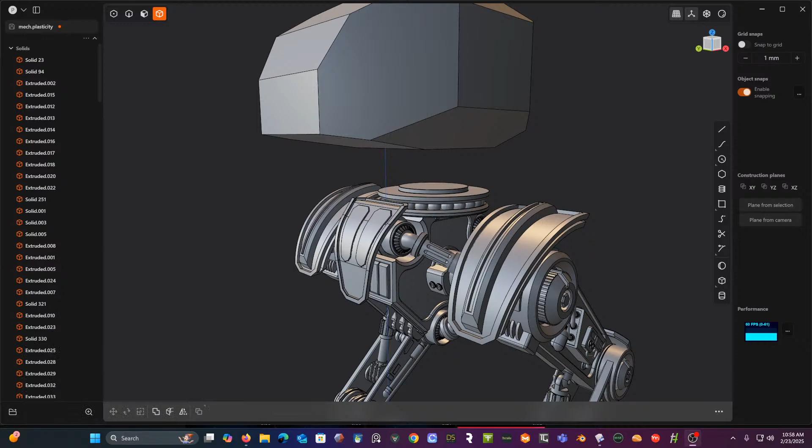Right now I'm just checking out some of the stuff I've done before, trying to figure out what I need to do next. I think this toe has more detail than these other guys here. So I think I'll duplicate this toe and these parts around, using a radial array, doing it 4 or 5 times, then deleting the extras. That's what I did to begin with.

Now that we've got that toe made better, we're just going to grab these pieces here. Hopefully no problems - yeah, we've got the tread. I think I might have already had tread before, but I was wondering if maybe I hadn't.

I'm going to go from the top view. Let's hide some stuff out of the way - I can't see, so that always helps. We'll unhide this stuff shortly, just want to get it out of my way.

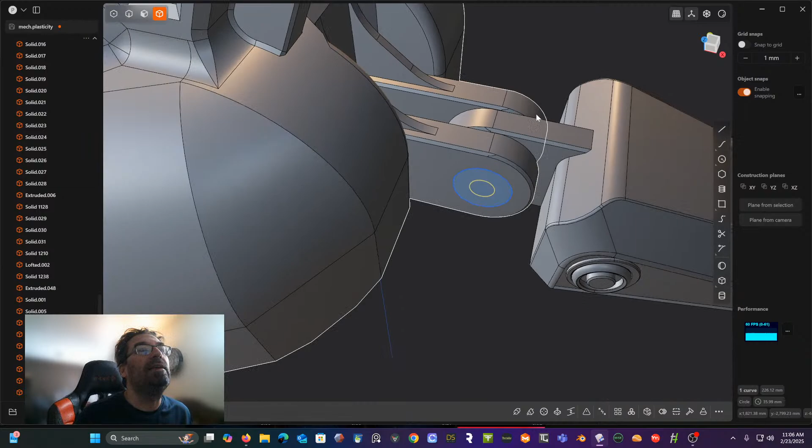I'm going to now, with this angle here, make a cylinder first of all that we're going to delete because this part is already solid. If I make a hole here, it's going to be difficult to go around and radial the physical hole that I made.

So what I'm going to do is make an object, and then we're going to boolean that away from the main piece. So if I just grab this guy, hit W, select the piece I want to minus it from, and go like so, it's now gone.

But we need to also do it to this other object because it is a separate one. I'm going to grab that guy, go here to my curve or my face mode, click on that. We're going to say W from this guy and now push that through for him too.

And now we have a hole through for both of those. Not what I wanted to do though. I just realized my whole purpose for doing this was not to do that. Once again, let's get this back. I need to make an actual object, not the hole.

So grab that, we're just going to pull this out a little farther on that same axis. And now I'm just going to extrude it through without the minus so that it just comes through as a solid object, because that will be deleted, so not worried about its length or anything.

And now I am going to try and radial array that around again. Should have left everything turned off. That's okay, it's easy to do because I can just marquee select all this stuff. Just get it out of here.

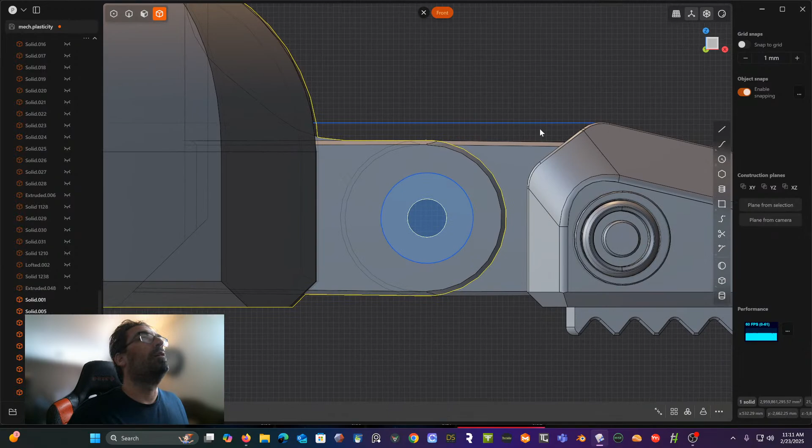Now in leaving these circles here, we are set up for our pin. I do chamfers and stuff sometimes just because, you know, these will never be seen. So I'm not going to do them here, but sometimes I do that so that they look cool. I don't know that I'm even going to make the pin for the middle because these could just be caps on either side, you know.

So let's just go ahead and loft from here to here, see what happens. And now we're going to make this a rounded shape. So let me see if it will let me turn down or up the tension. Does that work?

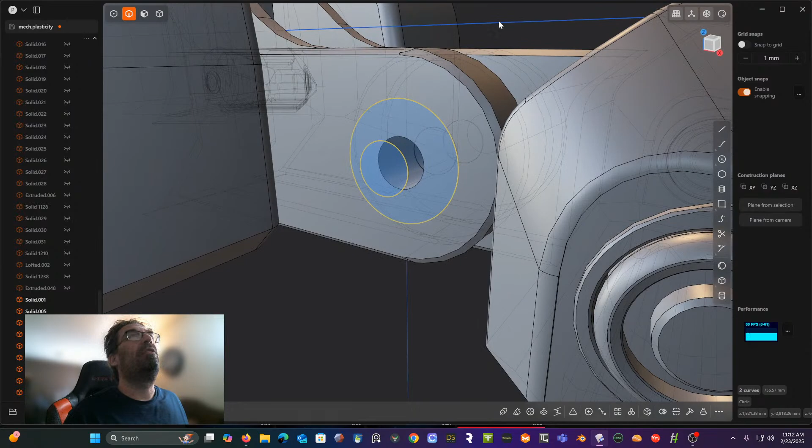It probably wants some form. Let's undo that. Yeah, I'm going to have to probably either put a guide in, meaning let's make a third circle. You're like, what do you mean by that? Well, let's make a third circle. I'm going to turn off the internal lines there. I'm going to grab this dude, I'm going to duplicate it.

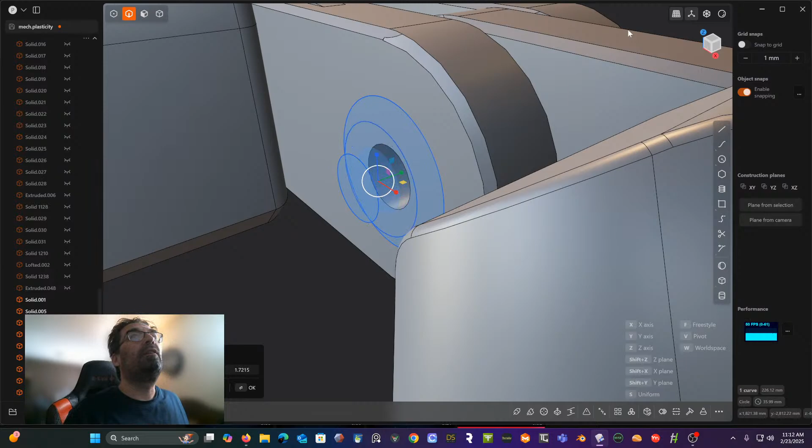We're going to move it in somewhat farther because I'm just going to loft between these 3 shapes. So scale, we're going to pull that out, and then we could look from the front or the side to see where that offset's going to be. And I want this to be like so, I guess. I'm going to grab it, move it forward just a little bit like that, to where it's more in the middle. Hopefully this will loft pretty.

And then we're going to grab these in order and click L. And yeah, that looks pretty good. And then we can take this shape and just cap off everything like that.

Looks great. And then I'm going to go and take our circles, not the lines, because remember those other lines were for our division of the middle of the foot. We may use those yet again.

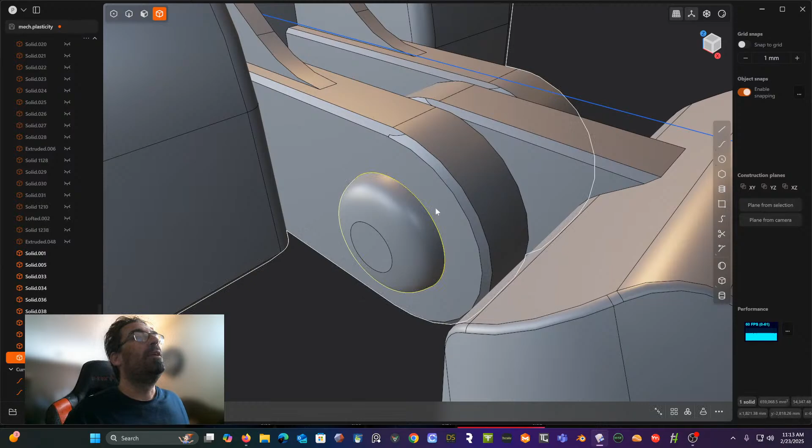So I'm going to take this one here, grab its edge and chamfer that in. We don't need to do a bevel on that because there's just no point. I don't know why it's in 3 pieces. We're going to see if that joins up. And then I'm going to chamfer that in to give us a little bit of separation there, like so, because it will catch light and all the good things.

And then I think maybe just one, let's just go ahead and do a fillet, a tiny fillet right on this edge because it helps catch that light nicer as well.

And then let's go ahead and push this shape inward a little bit. We could go outward. Maybe we should go outward. Now, we can if we do it as an extrusion. Let's see, if we go this way, we can... nope, that's not going to do it either. It's got to be an extrusion.

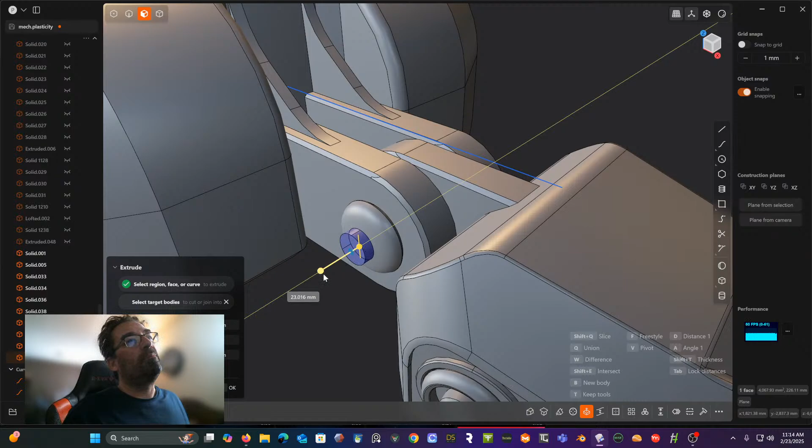So, extrude, we can come out with it. Looks a little more like it's some kind of a pin, I think. I like that, so we'll just go and do that.

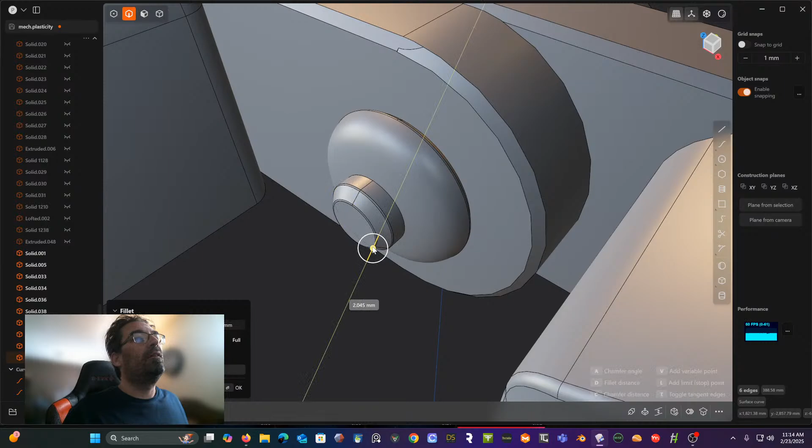And then I think I'm going to chamfer that edge to give us a harsher kind of chop there. And then we can fillet these remaining edges here slightly to catch the light, like that. And I think that's going to look pretty good.

All right, so that is our little kind of like rivet that we need to duplicate multiple times here, but we're only going to have to do it once. And you'll see what I mean, because we're just going to take that, we're going to Alt X to mirror it. We're going to go with freestyle, and we're going to mirror it across here. And we need to click merge halves together.

Did that do something weird? I am not sure, but let's undo. And let's do this with merge halves together. I think I can do that while I'm still in the thing. So we're going to go with Alt X, we're going to click merge halves together, and then I'm going to go with F, pick this line to get that over, and boom. Okay, so we've got those, and I think this acts as now one object, or is it two? It is two, but that's cool.

All right, so with both of those selected and everything's still hidden, thank goodness, we can now apply those all the way around the model and delete the unused or unnecessary parts. So once again, we do have our points. We're going to turn on that so we can see where our middle is, and we're going to radial array right around that guy. Let's make sure we're right on it. We are. We're going to right click to accept, and then we're going to delete any of these extraneous ones here. And now we have the foot with the cool pin joint there, which really makes a lot of difference, I'm seeing. That's always a good thing.

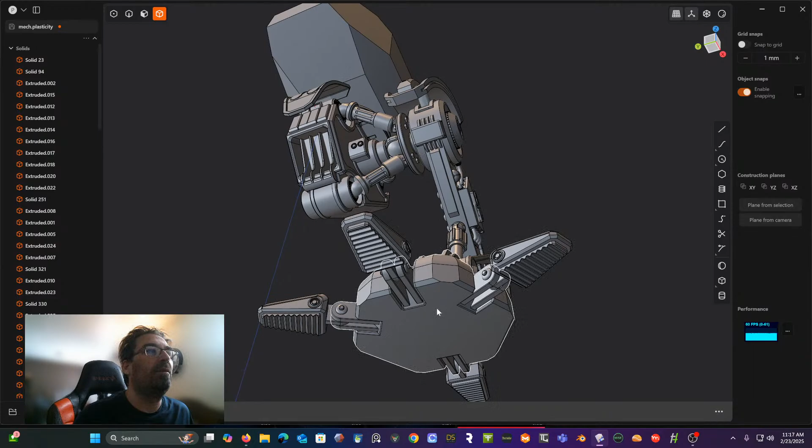I'm not sure what else might be kind of cool here. We could put a spike on the foot. Could put, I don't know. Let's see what it looks like with everything else turned back on again, because got to keep checking back and forth, you know, iterate, man. Just see what looks good, take away what doesn't. I think those little pins and stuff really help that foot have the right extra level of detail, you know, that it did not have before. I don't think, I mean, we might put some kind of thing on the bottom for when he lifts his foot up, but I don't know. I don't know.

Anything else look like it needs? I mean, this is all mainly mechanical stuff. I'm going to really be careful about hoses that are in moving areas because I don't really want to have to animate them if I don't have to. And I am thinking maybe doing a sort of ridgy thing maybe there. On the back side, I was thinking about making it, and see, this one's kind of like that, stepped. So in case somebody needs to step up on the leg for maintenance, I think it's a good idea. I'm not sure what I might have been going for there.

I like the fact that I did that. This one obviously needs the same little wraparound scenario. In fact, I think that is just a copy. So we can get rid of that. We can get rid of that one, I think. Make sure there's nothing on the inside. We're going to get rid of both of these as well because I'm going to copy and paste the other ones and rescale them. Nothing on the inside of that one. So we're going to take this guy, go from the side here, and this just adds our detail that we've already done without having to do it 20 more times.

And we're just going to pull this down and snap it to that center. And then we're going to scale it down till we see that ridgy detail, and we're going to need to pull this forward, grabbing and pulling that forward to where it sticks out where it is supposed to. I don't like the fact that those are chopped. I can worry about that later though. And I want to see from the front just how much more or less this one comes out.

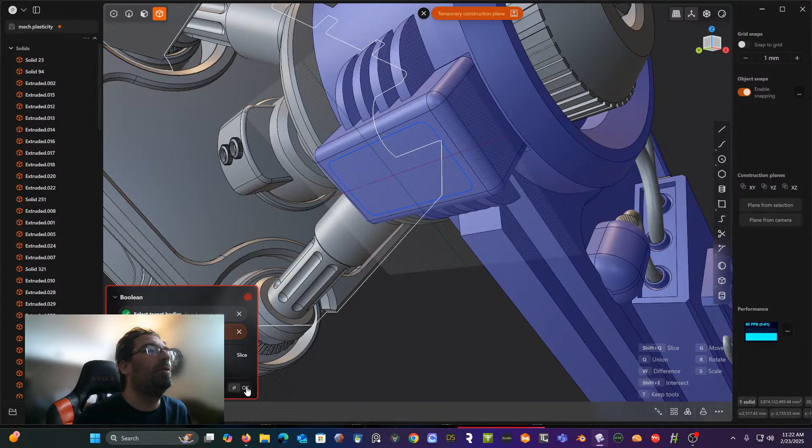We're going to grab here. We're going to cue. Nope, we're not. We're going to grab the main object is what we're going to do. Then we're going to cue, and then, oh, you know what I have to do is make this an actual piece of geometry. So I believe I can just do that by filling holes on this, right?

Heal tools, probably. I think they're doing this with B now. Nope. There used to be a way that you could tell this to just immediately turn into a sheet. Let's see, there's union, difference, new body.

Well, what I'm going to do is extrude it inward with a W, selecting this guy. We're going to pull that inward to start with. That's going to be our little hole, but I want to keep the tools. And then we're going to get rid of the curve.

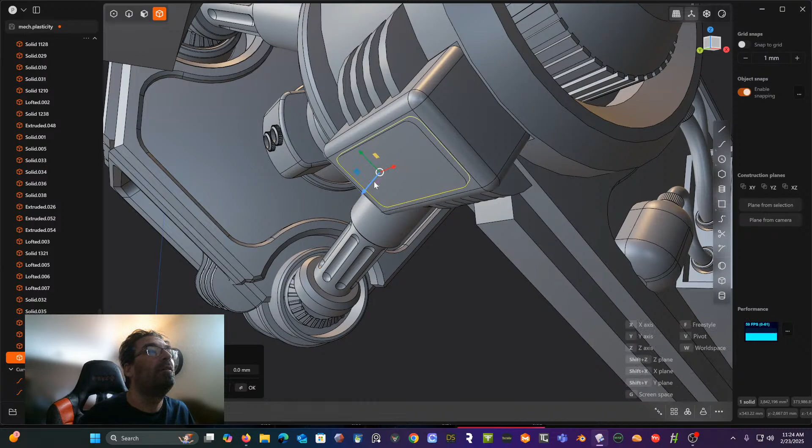That one. And now we should have two separate pieces. I'm going to get rid of the construction plane. We have this door. I'm just going to test this to make sure that it is, what do you call it, that it is hollow. There we go. I'm going to put that back where it came from.

I'm going to hide that piece real quick. And then I'm going to hollow this piece. But see, I don't want to hollow the entire thing. So I've gotten myself in a little trouble by keeping this 100% attached.

Let's just take this piece and push it back to be safer about that. And I'm just going to go about somewhere that makes sense like that. It's just a little maintenance hatch. I wonder now, oops, let's just push this back to about right there, maybe a little less, like that.

And now if I select these faces, if I can offset those, oh, but I need to make another little ridge here. So if I take this and offset this inward like that, we'll have our thickness of the actual unit here.

And then I should be able to take all of this, but not that. I just want to take the inside row here. Don't think it works that way like Blender did. Let's see, that's going to select all. That's going to select all. Okay, so I'm just going to do these manually.

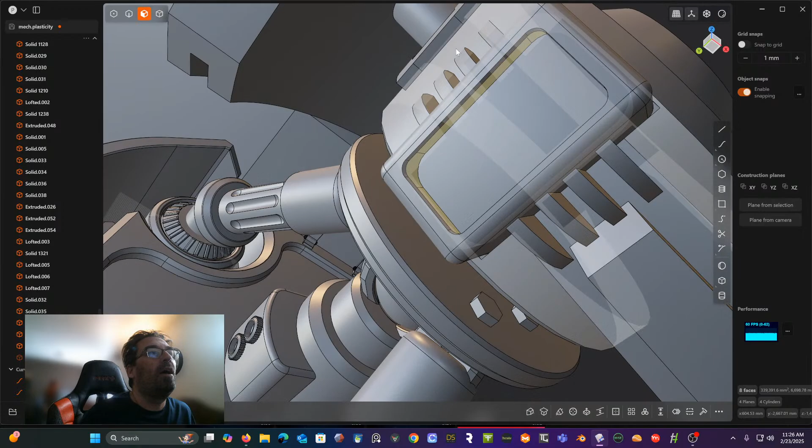Now I'm just going to chamfer a couple things. Just grab this edge. This one's not going to need it. We're never going to see that. So I'm just going to, you know, what am I doing? Not offsetting the face, I want this curve. There we go. And now I'm going to round that slightly here, like this.

Cool. And now we can turn on this door that we had made, like that. I'm going to round the edge of this door a little bit too.

So now you'll see a separation of those two panels. That looks much cooler. And I'm going to put a little handle, but I think all the handles on stuff like this typically get recessed, I think.

So let's use this as a temporary construction plane again. We're going to draw out what that needs to look like. Just a little recess. I don't know how big a man's hand is compared to this, so I'll just make a judgment. Yeah, that's probably okay. It doesn't even matter that much, but just enough to get a recessed area in here. I am going to do this in a probably a more odd way.

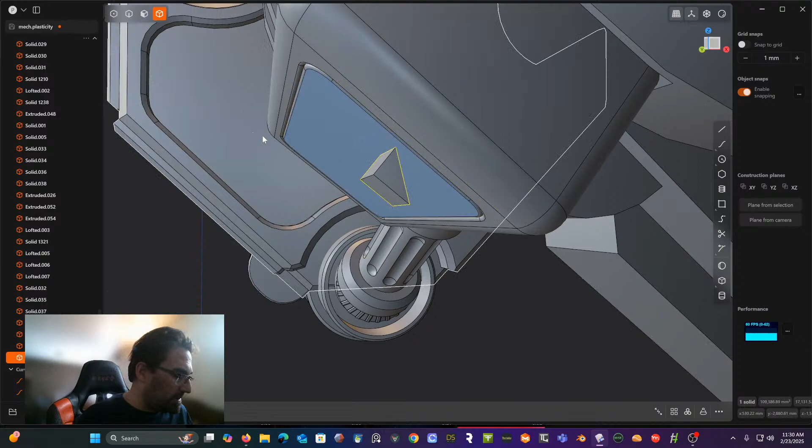Let's get rid of the temporary construction plane. We're going to take this door. We're going to Q, and then we're going to use that to get rid of what we're doing. So, but let's move it in place first. I mean, come on. And let's use V to say, hey, use it along that axis. By the way, if you didn't know you could do that, you can.

This is way too sharp. So one more bit here. Let's push. Let's just chop that end, I guess. We'll take this edge here, and we're going to push this in. I think that'll look pretty cool even with that angle.

Doesn't hurt my feelings. And now I'm going to grab that. We're going to move it. So I'm just kind of going as I go, making it up as we go. V, use this surface to determine where it pushes. Put this in place about there. And then I'm going to take here, Q, get rid of that, and boom.

We just wanted a recess. It took forever for something so simple, but hey, you know, there are worse things.

And let's round those guys. Let's round all of them. So I'm just going to see about dragging. It's going to get internals. Just the ones we are going to be selecting here. I don't want anything on the other side of it, of course. This is just going to be a small little fillet to soften that edge a little bit.

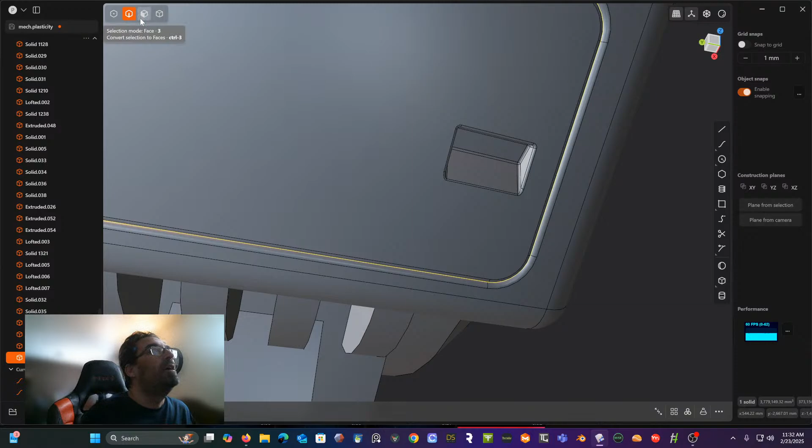Like that. Cool. We don't know exactly where the handle is yet, but you get the idea. A matter of fact, I could put the little handle if we really needed to, kind of like a door latch from the inside. So let's just take this guy now.

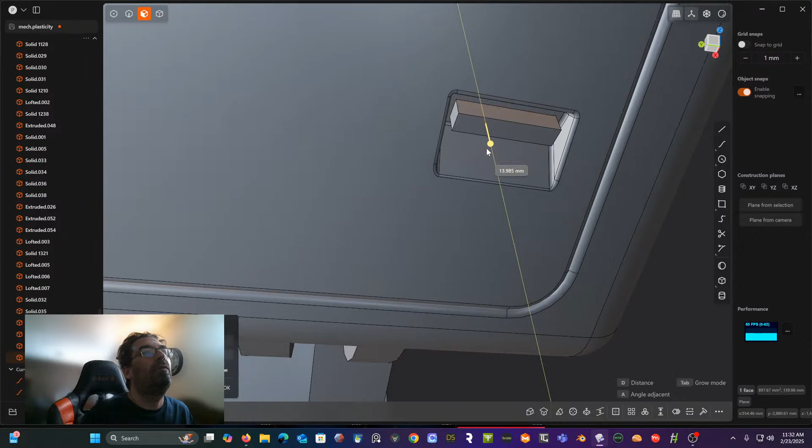I'm going to offset a line internally from it. Looks good, I guess. We're going to take this and just pull that straight out. And I kind of want this to angle down now, so you can, believe it or not, don't think you can do that with that. I think you have to rotate that now, like this. There we go.

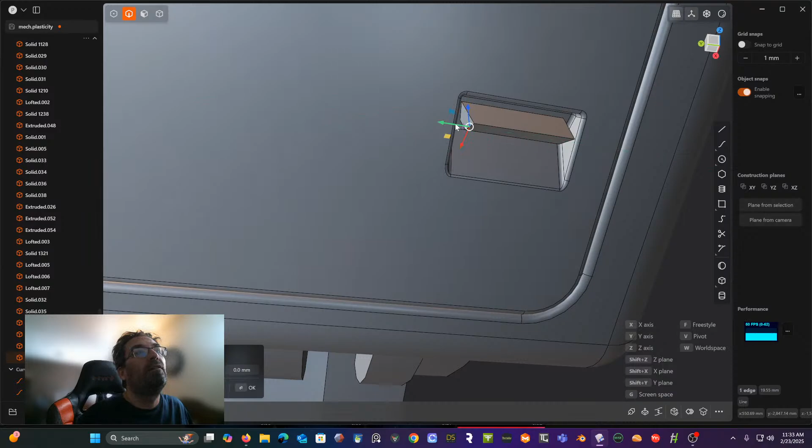I do want to scale that face a bit to where it's smaller from here a little. I don't think that's working either. So let's go ahead and just move edges. I think we can. I think you can move that edge. Still simple enough that it's not going to horribly destroy anything.

So we do this, we scale. That is not letting me scale though. Interesting. Scale, that's just filleting. Why? Different.

Okay, so we'll move them manually. Grab, go in a little, grab, go in a little. You can notice it's pulling out the top while it's moving the bottom in. That's a little weird. All right, cool.

And then I'm just going to take this and pull this down and taper it. That should be an extrude like this. And we should be able to scale that at the bottom now, like that. Maybe a little bigger so it has some thickness at the bottom edge. And then, of course, we can come in and fillet, whatever, to our heart's content, as they say.

Something like that, a little more ergonomic. Maybe even these two. Could even round it off completely by doing this fillet here.

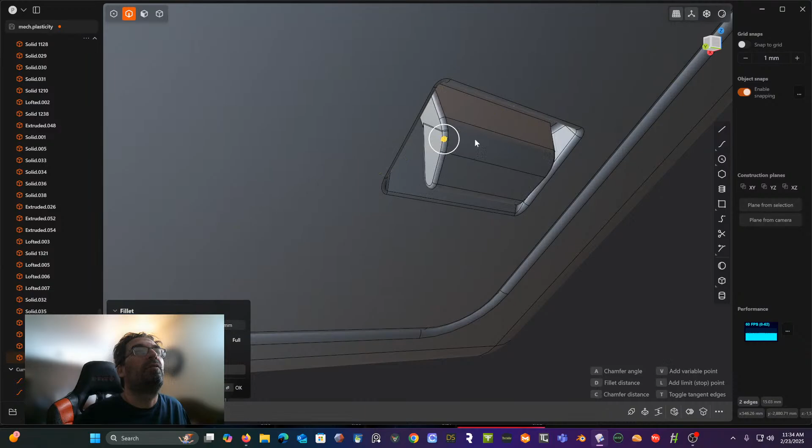Don't do this full. Okay, we're going to select that edge and that edge. This should work still. Pull those out to something like that. Nope, that didn't work. It's because we have some redundant topology, I'll bet.

So let's grab the... so I kind of grabbed the whole door. Of course it is, I did not separate this piece, which I should have.

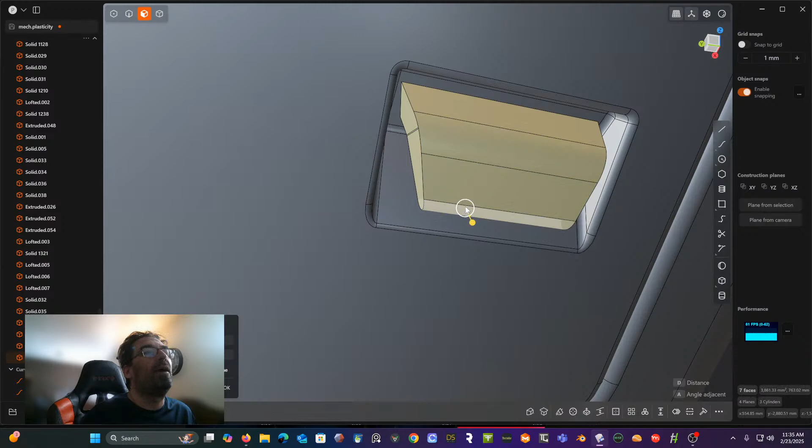I'm gonna go see a man about a horse. I did not realize until last night that that meant I need to go to the bathroom. Is that weird that I didn't know that? So I gotta go see a man about a horse, meaning I have to go take a dump. That is what that means. I'm totally blown away by that. But I didn't know that. I thought for years, well, what does that actually mean? And I never looked into it.

Weird. All right, so there should be a separate here, and I don't remember. Offset, raise degree, rebuild. Let's see, there should be a separate or an extract.

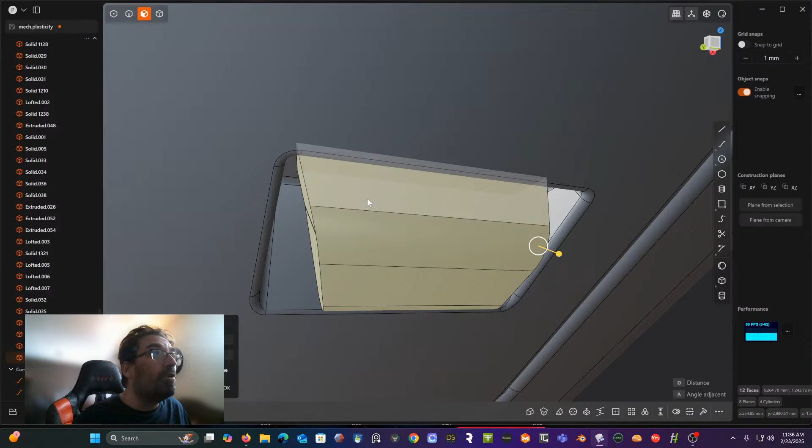Extrude. Can you cut and paste them, I wonder? That is a good question because I don't really know. So let's go Control C. Nope, Control C, nope.

Cut solid with curve. Mirror. Boolean. Scale. Maybe if I duplicate it. So if we Shift D, that should be its own separate piece, I think.

So I'm going to hide it, and then we're going to take these and delete those. I believe we can do that. Or not, okay, there's a few being deleted. Not really doing entirely what we need.

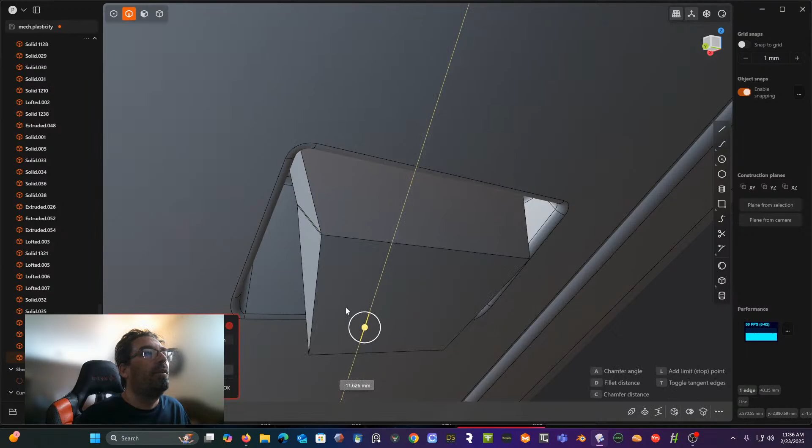And I'm going to take this edge, see if I can just push that back up in here. I mean, to some degree you can, I guess. I wonder if you could delete this face and make that work. Sort of, push this across, maybe that will work, at least to some point.

Okay, we'll accept that one. See if we can do it again. Fine, that works for me. As long as it's out of the way.

Then we can turn this back on. Oh no, oh yeah, it's there. And now we need to make that a solid, which we did. I'm just going to call this handle because I'll come back to that later probably.

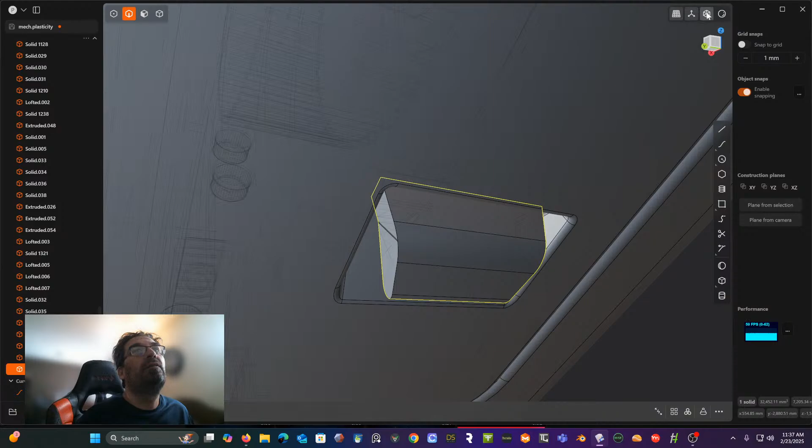It's possible, and grab all the edges. And as Pixel Fondue says... I don't want edges for everything. How do we not select everything and only this?

So I guess we can solo this. How do you do it? Alt-click it. Alt-click, Control-click the visibility. Shift-Control-click the visibility. Solo it. How do you solo it, he wondered. I don't want to have to click everything else. That's kind of silly, is it not?

So with that there, like that, I'm going to grab all the curves, and we will put a little fillet, just like they say in good old Pixel Fondue. That is not working.

So let's take this and maybe delete the redundant topology for starters. I wish there was something much simpler here. Let's go ahead then, if that doesn't work. Not grab all edges, but just grab, let's say, these two curves at the bottom, which should also work. That's all I wanted right there.

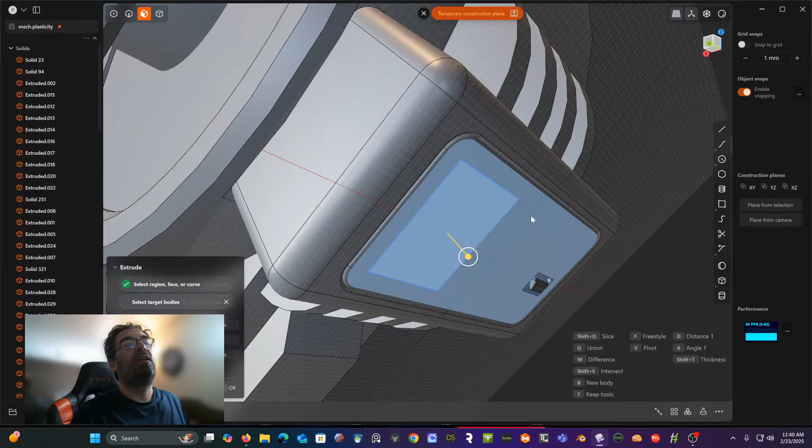And we'll just pull that forward a small amount to give it a little dimension. Not that this detail needs to be 3D. This could just be a sticker, but I like the fact that... trying to think of my words here. It means it's an actual metal plate on there as opposed to something else. So let's round the corners off here now and then extrude it out a little bit.

There we go, good enough. We can put a couple rivets on the sides of that too. Let's just go back here, and we can make a couple of, let's make a circle, kind of here.

That's a little big, so let me undo that. Turn on our X-ray, make a smaller one. So these are just going to be like little rivets that hold the sign on during battle. You know, we don't want that to come flying off and somebody doesn't get their warning and OSHA gets called in or something.

All right, so that needs to now move. We're going to go grab, we're going to snap it to this surface here. And now we can make our hole and our rivet. We don't need a hole here though, to be honest, so let's just make the rivet.

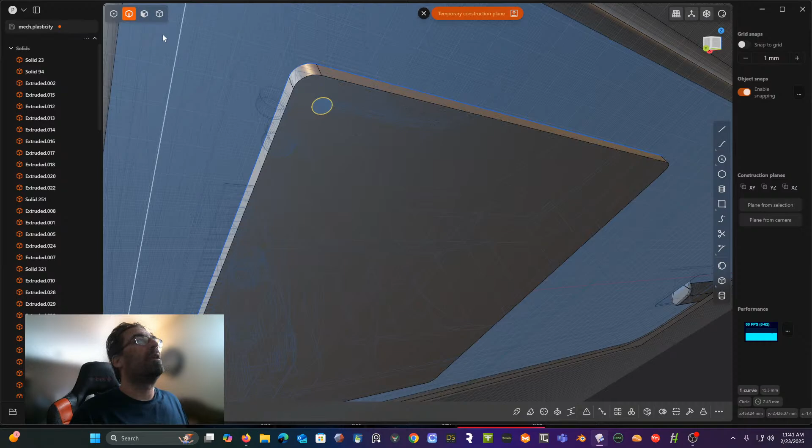There's a couple different ways we can do it, but I'm just going to extrude this guy out and round over the edges a little bit. We could even chamfer those edges instead. So if I grab that and, oh man, it gets confusing, too many lines. And I chamfer that back in like that.

We could then... look at me trying to get too detailed about a rivet. But hey, if you're not willing to, then what are you willing to do? Say hey guys, there's a chat, if you want.

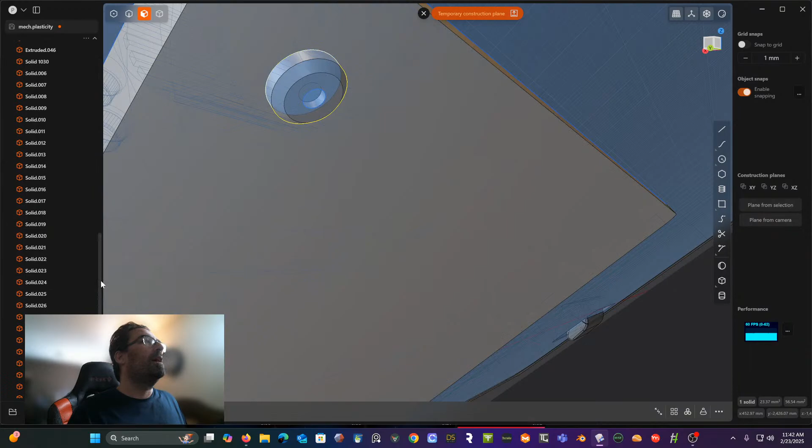So I'm gonna go here, W, we're gonna remove it from here, and I'm just gonna push this like that. It's not gonna go all the way through because we don't want it to, of course. And then I'm gonna get rid of any curves we don't need, like all that. And go kabam. Turn off the X-ray, get rid of the construction plane here for the moment. Turn off the X-ray—I know there's a toggle, what is this shortcut?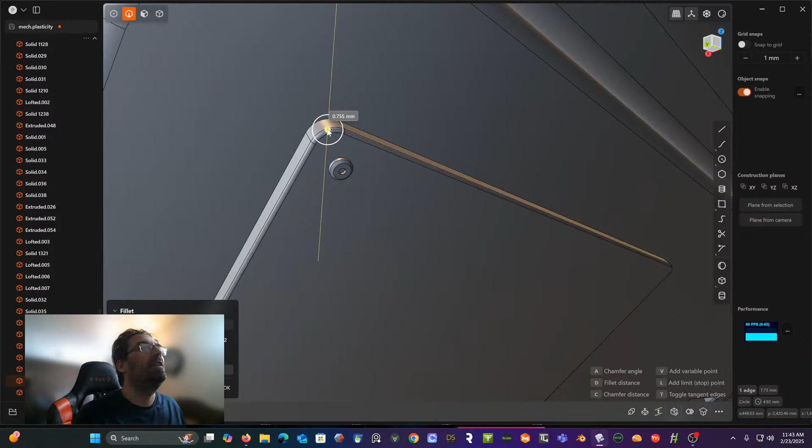Alt-Z. So that looks pretty good. I don't think we need—listen to me, I'm going to do it anyway—I'm going to put a little tiny bevel right on that edge, just to catch the light. Okay, and then now we're going to duplicate those. We're going to put those where they go.

I'm just going to grab here, and we're going to snag that object here, that one. And we can... I don't think we need to array those. So I'm going to Alt-X, right across this piece. Boom.

Good. And then we're going to take both of those and Alt-X those this way. When you have a temporary construction plane, it doesn't look for the center of the world to do that—you can do it locally that way.

Okay, cool, so there is that. I think that looks pretty good. Not sure, I guess that's sort of a maintenance hatch, tells you what—careful, there's high voltage or something in there. And then we've got whatever these things are, and we could put venting maybe on the side of that. That might be kind of cool.

The way I would do it, yet again, we're going to go to a temporary construction plane here. I am going to make a rectangle, I guess. And this one's not going to fit to start with, it's going to be turned the wrong way. But that's how it is.

And we're just going to line this up as best I can, like so, and grab it and move it into place like that. Yeah, I think leaving it short keeps it from looking like this one.

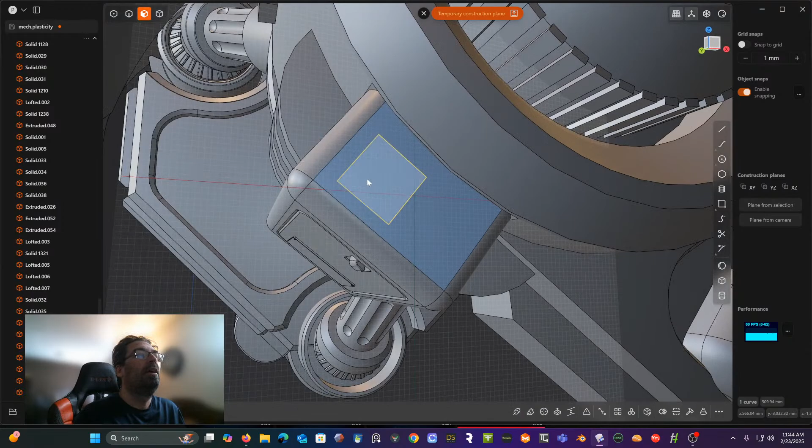And so with this, I'm going to duplicate it because we're going to use it to punch a hole in the side of this. And let's go with duplicate that curve, and then I'm going to take said curve, and we're going to grab this box.

Q, and grab—okay, for some reason it's not grabbing the curve. Let me move it out. It's probably embedded in the side there. So just move it out a little to ensure that we have distance. That one now is one we want.

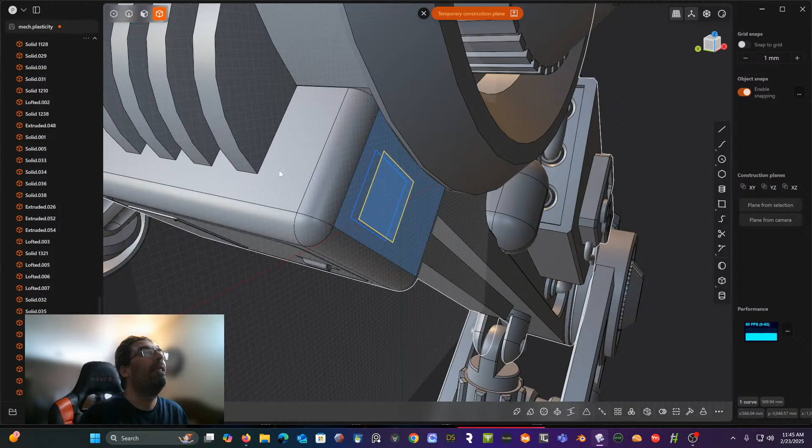So we're going to go from here, grab the object. I'm going to go Q, grab the curve. It is not letting me do it. Why? Oh, probably because that's just a curve. I'm going to need to actually make a...

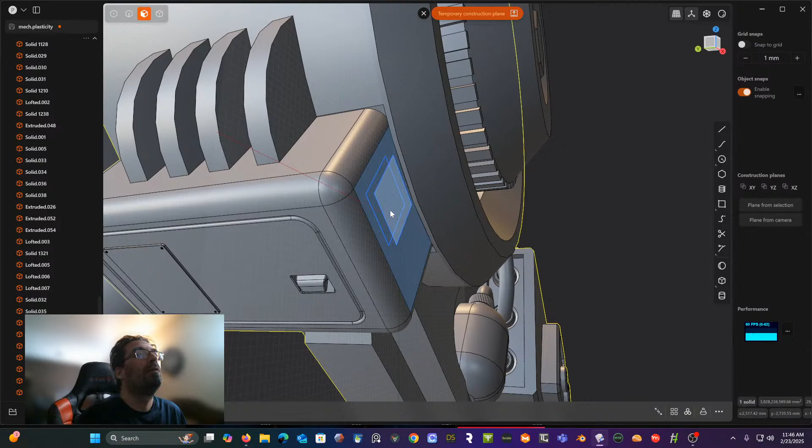Building of that. So now we go into Q, and now we select W, this guy, and pull this in, and we will get our cut in there. I'm going to delete this curve now—we didn't need to, I thought we did for some reason. And with that, okay, that's what we want.

I'm going to go into our construction plane again. I think, yeah, I'm just going to scale. Can I scale this locally? V, right? There we go. I'm going to scale this way.

Like that or something, I think. I'm going to then move it locally as well. Like that.

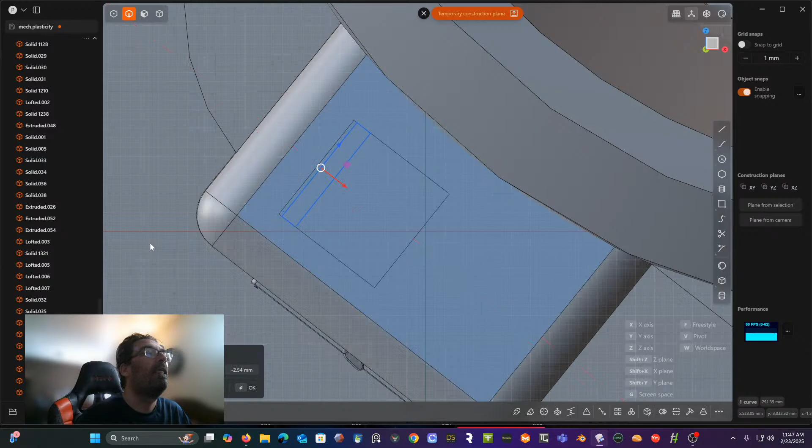Okay, I'm just going to try and take a look at what I'm actually doing here. Where am I? What box? Oh, that one. Okay, and I'm just going to make a little panel like that.

Maybe a little more. There we go. We're going to rotate that. Object mode would be good. So let's rotate it, but we've got to get rid of this temporary construction plane.

So we're going to take that object now, and it is not wanting to rotate. I have not seen that one yet. Maybe my keyboard stopped working. Hang on, my favorite thing in the world when it happens. And it does, it's some kind of driver issue.

And I'm going to take that now and rotate. There we go. This doesn't matter exactly which axis or which edge you use, as long as it is rotating around one of them like that. Just going to kind of get a look at that. I'm going to get rid of that curve, it's very confusing.

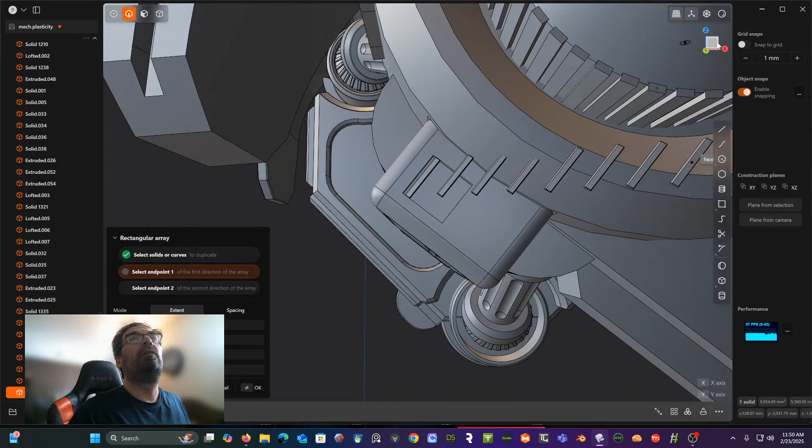Why you do this to me, dammy? Let's look on the cube here. There we go, we just want to go from here to here. I think that's enough, maybe we'll make one less, like 7 of them, to just give us a little space in between like that. I think that looks pretty good.

We could take the entire grouping and move it a little more upward this way, to where it has that little space at the bottom. I'm going to hide this bottom one real quick so I can see that bottom edge.

Push this down a little bit. Unhide. Oh, did that not work? Let's push that down just a little more. We will right click, good. And then we'll turn on that other one here. We should have enough room for a little bit of gap there now.

Also, hopefully, gonna take these edges and do an offset of those from around here, and there we go. I love when it actually works. Something like that.

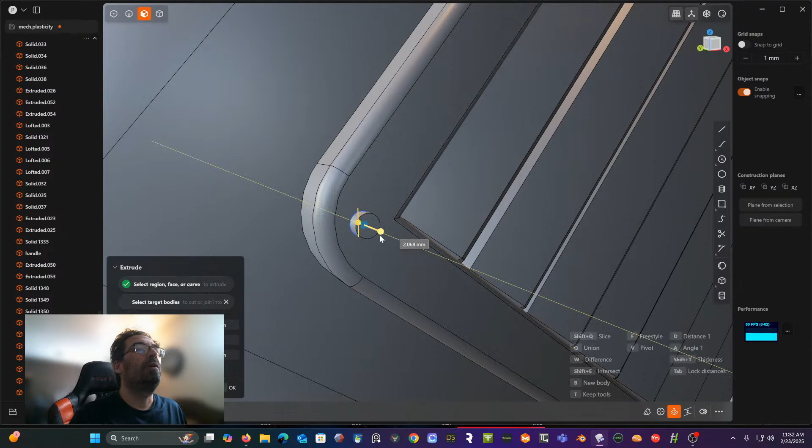Cool, grab the edge. Never going to survive. You love it, you know you do.

And let's just go ahead and see if we do a full... it doesn't want to. Normally it will full round that. I don't know why it's not, but we'll just keep that. Looks fine, and those are tiny.

I don't think I like them, so I think I might just chamfer those instead, and do a little hole in the middle just like we had over here.

Let's put it on from the front. Sometimes it can't find the center unless you do that. I'll grab this, move it here, say W to subtract it from that piece and push this in. Boom. And then if we wanted to, we could add another, fill it in a little bit like so.

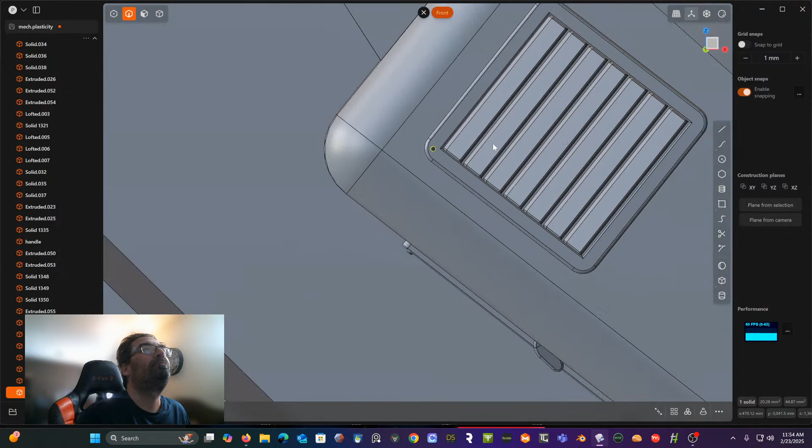I think that's fine. So now I'm going to go from the side here, and probably use this as my construction plane. Then I'll grab this, and I don't think the rectangle array is going to work the same way, but we could go with 4 or 5 of these, maybe 4.

I like the 5, that's cool. That way, duplicate them, of course, and move them here.

And then we could rectangular array, probably both of these, I think. And yep, that works beautifully. Put those here to there, maybe. It's a little bit pinched in.

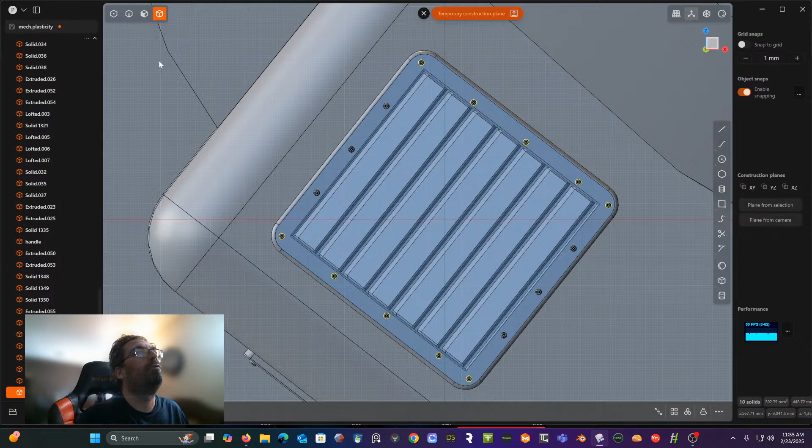And then maybe knock this down to 4. And then we could take these and these. I don't know if this is going to squish or not, but we're going to try.

We'll go from here and separate those out slightly like this, and then grab the whole bunch and move them back along this axis, this way. I think that looks good.

So now with that, we have a vent and a box, a little toolbox. Things just seem very basic shaped here now, so I'm just going to start playing a bit. Something that may work, I don't know. That's some of the issue too, is I don't want to cut through everything, you know.

So I'm going to make a couple of isoparms, or at least one isoparm, whatever they call them in here, by selecting this face and going, was it Control R, getting my... is that, yeah, there it is. Maybe making a panel kind of separation here, and do another one along this face. Yeah, something like that.

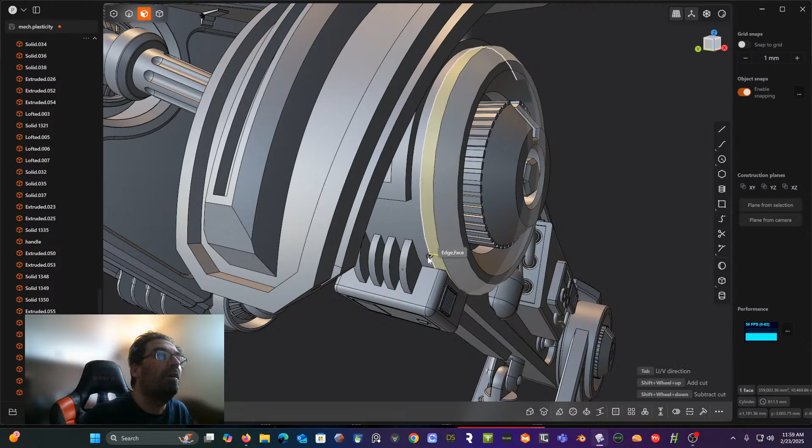So with that, I need to do a Control R, trying to bring me a little split right about here. We'll do another one up here. This should work. So grab that face, Control R, do another one, you know, maybe to match that line.

And then this should be able to extrude with no problem. I don't want to offset though. I want to actually do an extrude, I believe. It's going to try and grab its own face here. Let's see if that works.

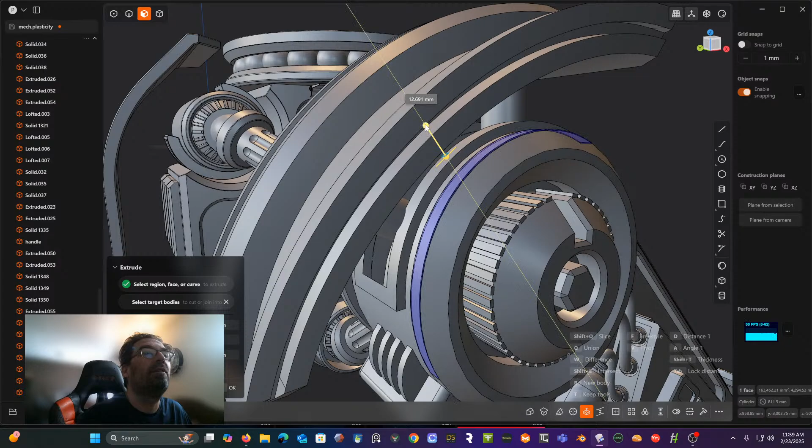It does extrude in that direction, but it's not doing it uniformly, which I kind of want. So undo—this would be more of an offset, but I don't want that. I kind of wanted that edge to not do what it's doing now, so an extrude would be better. However, I don't know how to get it to extrude in all directions, like from the normal.

I may wait on that. I don't want to do that all on camera and bore everybody in the world watching with that.

Now that I have that, I can make this a smaller section here. I think that's what I want to do, by Control R, getting me one of these bits. I'm just trying to make some panels here, if that makes sense. So, like so. Nope, that did not work. Control R.

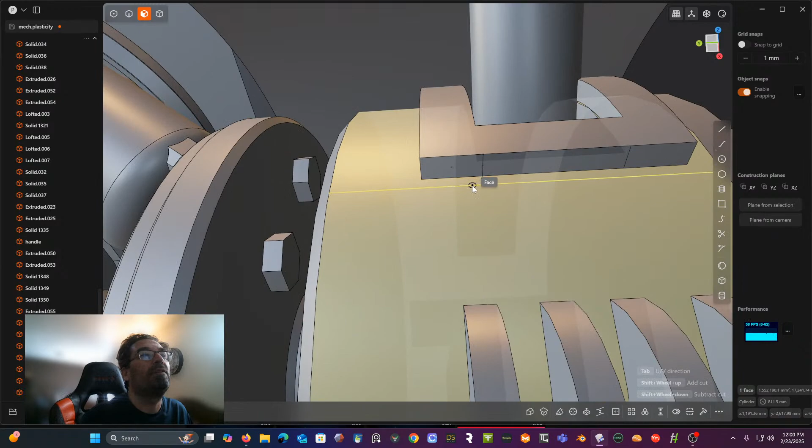Maybe it's Shift I'm looking for, just trying to get this to be a little more finely placed. There we go, it just keeps snapping. I could turn the snap off, I suppose, but let's go there. And let's do another one here.

And just like so, I want to maybe do a panel right here. So Control R, Tab, so maybe like that. And that way we can extrude or offset this one some. I'm just trying to make panels, you know what I mean.

Panels, let's go out here. Right click here, right click this one a little higher than that one, but that one will need to be an extrude or stay lower. So let's undo that.

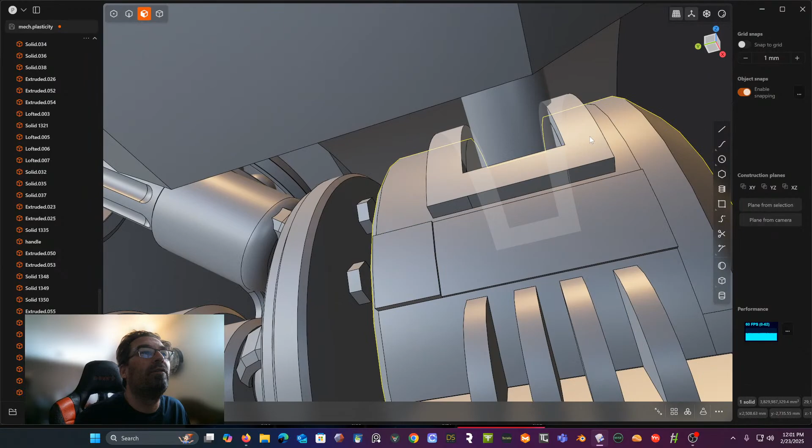And I'm going to extrude now. Of course it makes a little weird separation between the two, but hey, it's fine. Let's go ahead and try to chamfer the edges of that. That will at least, I don't know, give it a little sense of something.

And instead of chamfering, let's just round them slightly. It catches the light so much better, and I think we have polygons for days to play with, you know. I'm a ZBrush dude, so if I can handle that.

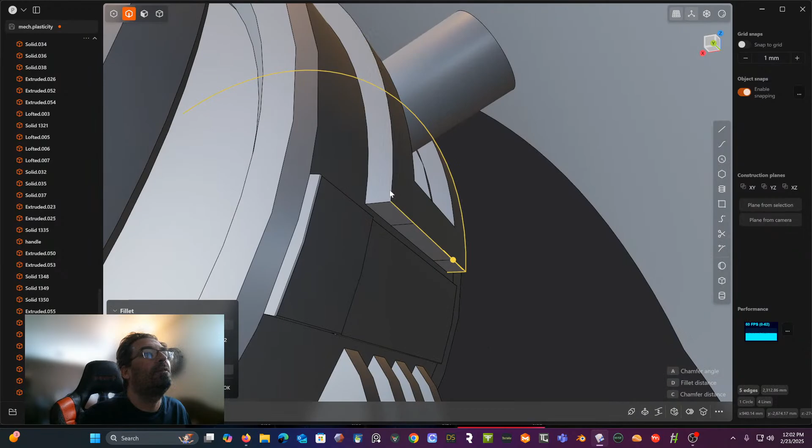Let's do this, and this, this, and this, and this. Just trying to give us a little nicer shapes here while I'm looking at it. More often, I mean usually I do this more methodically, like I'll just go and do every single thing, but right now...

Why is that not working? Probably because we have these internals. No reason why it shouldn't be, though, to be honest with you. Let's go in and maybe deselect. That's a weird shape, I don't even know how I got that going in there and being so strange. Can I find it? There it is.

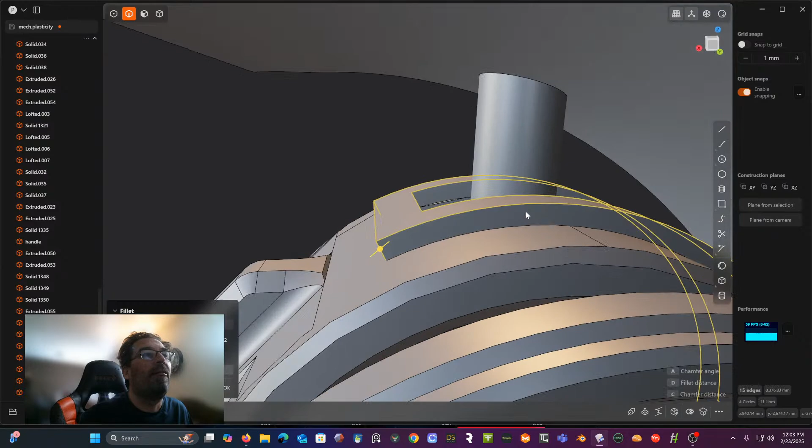Let's just do these outside ones a bit. That looks nice, and it did take, so that's always a good thing. I wonder if I can pull that face back down here and have it just fill in. No, that's going to do that. Cool, all right, not a biggie. Good, good.

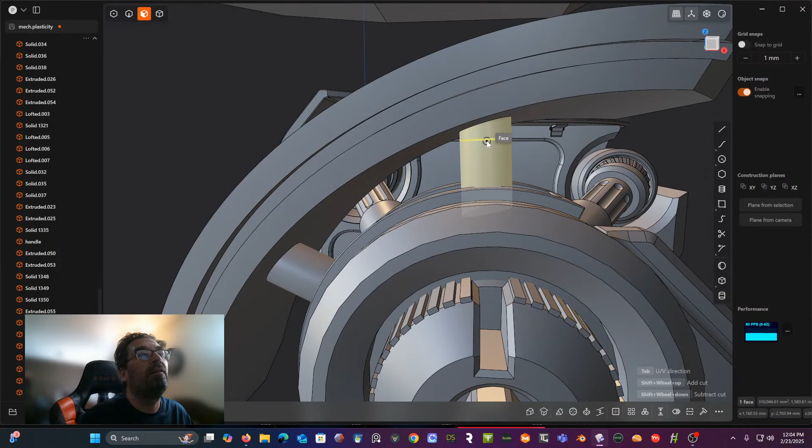I don't like these just simple posts, that look, it's not good. So what I might wind up doing is notching these down and stuff by selecting this and doing a little, this guy, and going Control R, Tab, trying to get a little difference here, and we can go Control R, Tab again, maybe like here.

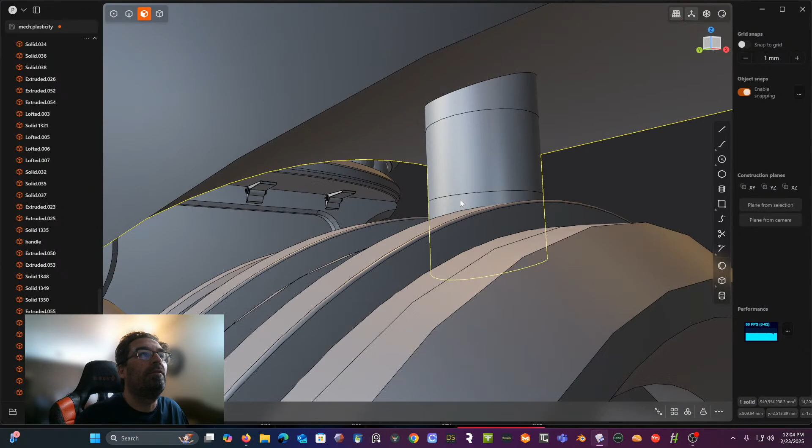So many things in the way, but that's okay. And I'm going to select this, push this in a little skinnier because I do not like it overlapping the rest of that. And this can be like so, and then this can be either out, probably out, yeah. I don't know why that keeps not accepting, but right click, good to go. That looks much better, I think.

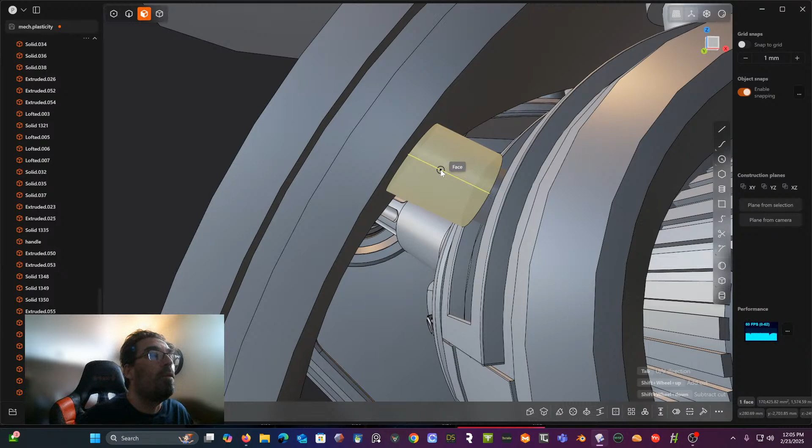Do the same here, Control R, that gives us a loop cut basically, down to here. And then I can take this surface, push that in slightly. Then we'll do another one here. Grab that, pull it out, and that's what it's all about.

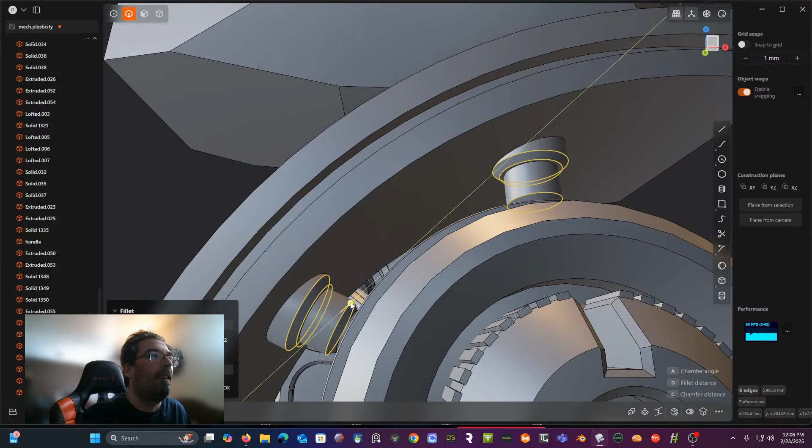All right, grab these. I think those should be chamfered first off, like this. And then if we want, we can come back in and give those a little fillet on there, like this, just a small one. That will just increase the ability for the sun to shine off it.

These obviously need them all the way around. I gotta start thinking about that. And we'll just pull this out a little bit to get these not too far. We only want small ones. I think that will help. These did not get them before, so that needs them.

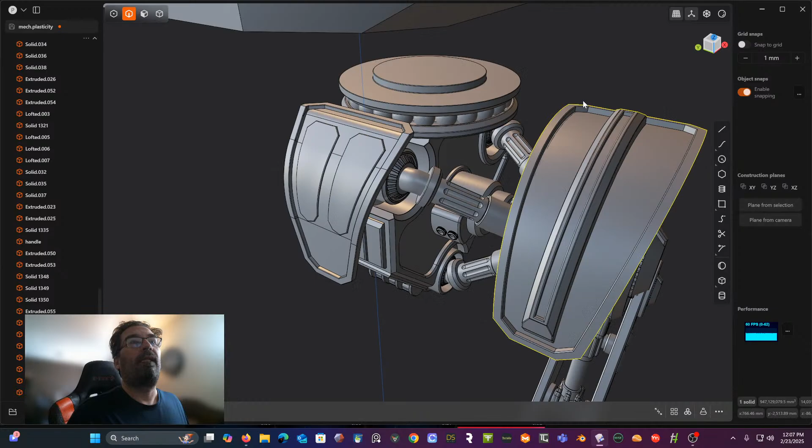Just slight little dudes like, maybe like that. Guess I didn't get this top in, so we'll try to see if we can do it after the fact. And those were not fillets, those were chamfers. So let's go ahead and grab these now that we can, and pull those out, slight little fillet going on there.

It looks nicer, it's not entirely done. See if I can grab these, or if that's too many to get. I'm gonna have to get these as well. And down here, just pull those outward slightly. And then of course this whole bit, I hope it lets me.

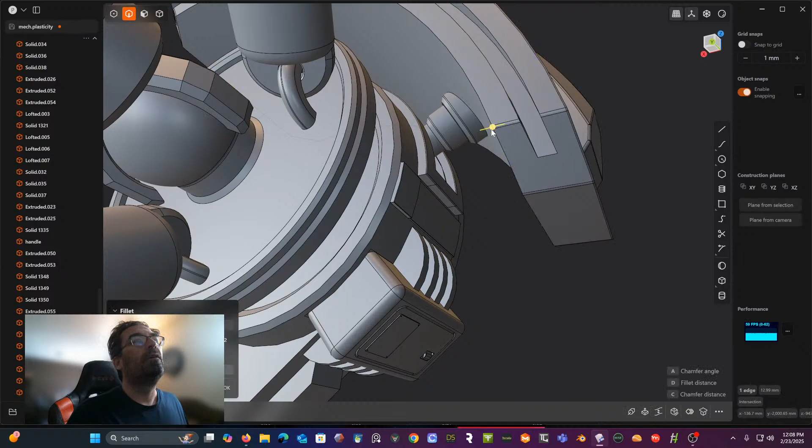Just a real small one there. Nice, and then of course this one should give us a nice round on the bottom of that. This one should, well that's just going to the bottom, so let's go back. We'll grab this, this, and these, probably have to do that also on the outside.

Yep, let's see if we can do them all at the same time though. Wouldn't hurt my feelings. How about yours? Nope, okay good.

All right, and now we'll see how it works. Just pull slightly, and we're getting it, and right click, and good to go. I like that, that looks much better. I don't know if you can tell, but when we add something like this and the edges off, you can really start to see these nice highlights on the edges.

Yeah, that looks pretty good in comparison to what I did. Our little door there is looking great, even with the little thing and that vent. These need something. I don't know exactly what they are, what they're for, but we're about to sort that out.

And I'm thinking maybe, I keep imagining these with little insets on the side. And no, I didn't say the word you think I said. Let's just go like this. Ain't no uncles and cousins here.

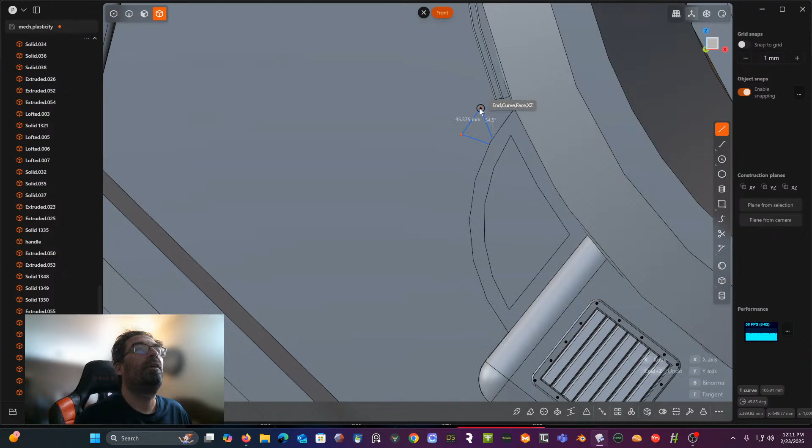And once we have that little plane that I can use, where am I doing this on? What am I doing that on? That is on this guy. I'm going to grab that whole little curve here. We're first of all going to join them, and I'm going to grab them and snap it over to one of these edges.

And I know there's a way, and I can't remember how to snap stuff or duplicate it along a curve. So I guess I'll try. I'm going to select this curve and duplicate that curve. And I think I can take this and then I can...

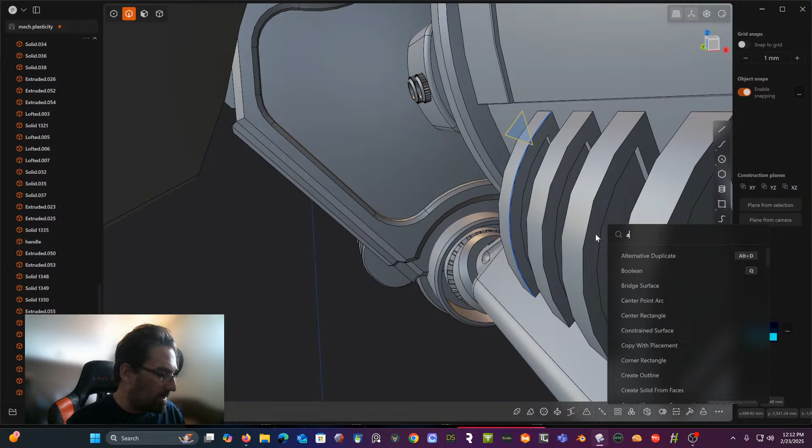Curve array, I think is what it's called. So we're going to go here and go curve. Actually I should probably just put in array because there's going to be a lot less things. Curve array, and then I'm going to select my curve. Look at that, it's almost like I knew what I was doing. We're just going to make these a lot more, maybe like that.

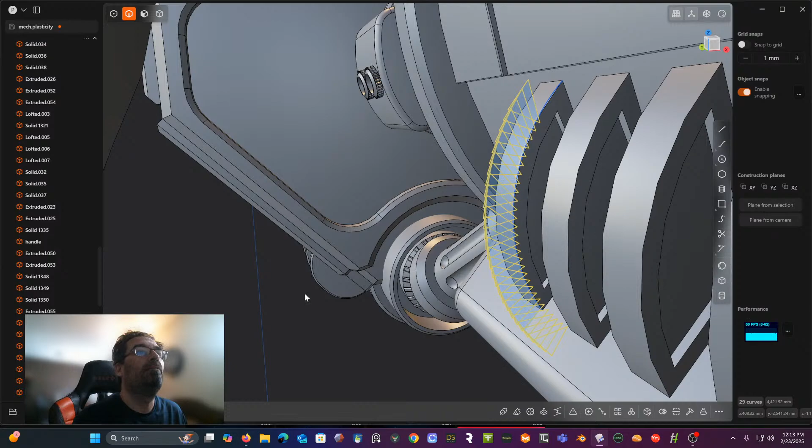And then I'm going to grab all the faces of those, I hope. What would be nice is if we could get rid of all these internal lines. Don't know that we can. I'm pretty sure we can.

So with the trim tool, it's going to go like this. It's going to take forever, but totally worth it, because this is going to let me make that little thing. I don't even know if I need this trim tool to do this, if we need to trim these, is what I mean.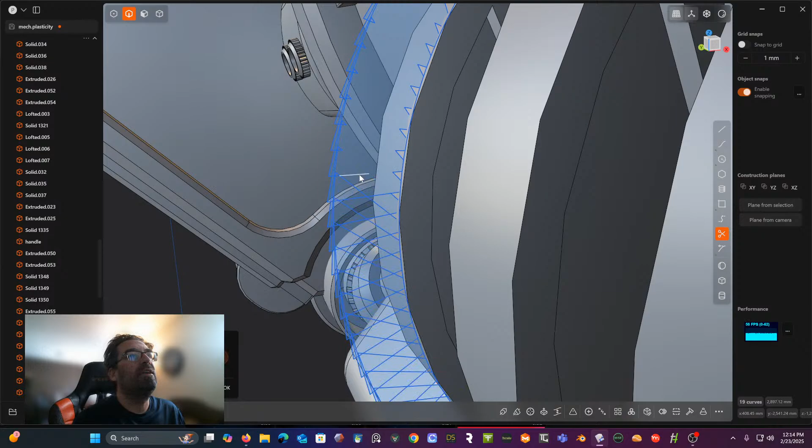But I don't want it to be wrong when we sweep that across, because it's going to be a boolean. So if I don't select all these pieces, I'm going to wind up having to select all the shapes anyway. I don't know, maybe I could have combined those. I do not know.

Let's just keep going here. Most of the time I'm like, well, let's try it. But today I'm a little less inclined. Why, you say? I just am.

Just going to get rid of these. None of those will affect it because they're all pushed off to the back. These really don't either, but I just want to make sure they're clear enough that there's no chance of it.

If you guys are watching, please say hey. I'm just here hanging. I like to hang with people and talk as I'm doing stuff, so have no fear, mon frère, which means my brother. Mon frère, frère, you gotta get that throaty kind of thing going on there.

This, yep, can go. This too. We're going to turn on X-ray so I can see those dudes, even though we barely can see those dudes. Cool, let's get the rest of this.

And good. All right, so with that, hopefully it won't look like crap and have all that work for nothing. I'm going to grab these right here, and I'm going to push that, or I'm not.

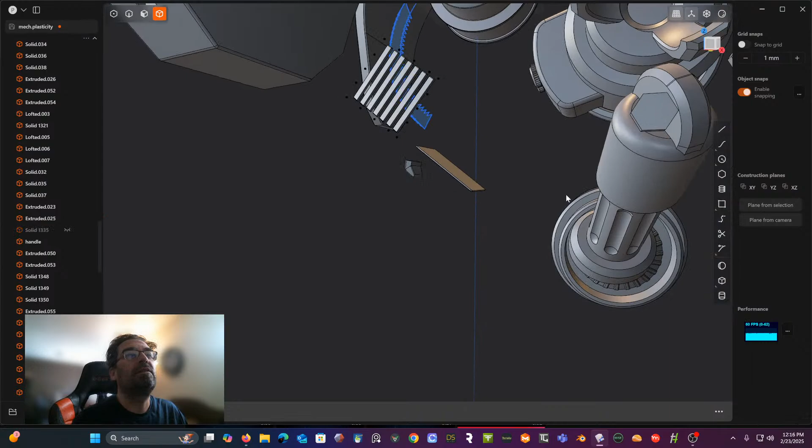I hate when I accidentally delete something and then I panic. Oh my gosh, what did I do?

That row, that curve also needs to be deleted because it's no longer needed. That's a little rhyme for you guys. Okay, and this we can keep.

And as you can see, the problem is some of these are not even connected. I'm going to see what I can get away with here. This is probably going to take 12 years to do, just like the last ones. Oh, you know what? We could do that. That helps so much.

Like this. And like this. That way we've got one continuing solid shape here and not a whole bunch of weird overlapping ones, which throw the whole thing into chaos, basically. It will never work if we use that like that, because there's some inside and outside and upside down.

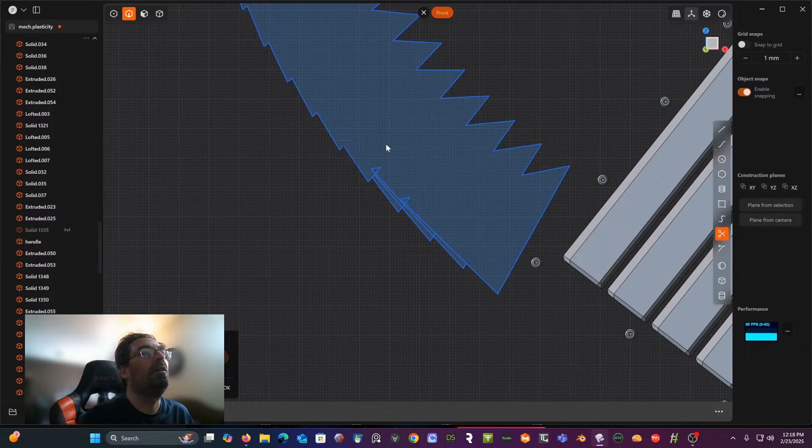You guys remember that, right? That book, did that get erased with the Mandela effect too? I don't know, but it is the Berenstein Bears. I don't care what anybody says. Because I remember asking my mother, is it spelled like Stein or Steen, when I was a little kid, and she said Steen. So why would she say that? Why would I ask that if it was spelt Stain? And it's not. I jumped timelines, I know that for a fact. I know I did. So many things were different. People liked me. There's that. Just kidding.

Yeah, I was a celebrity. Okay, so with that, we are done trimming. Now I'm going to try and extrude this across and make this a much bigger or much cooler dude here. So it does work finally, so that's a good thing.

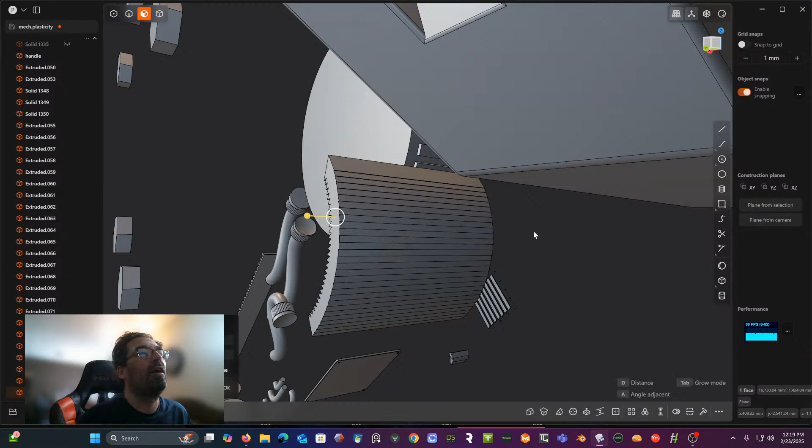I'm going to get rid of that curve though. Look at all these curves, crazy. We'll just get rid of all of them. And I'm going to now extrude this side or offset out this side. You're like, but why, Sean? Well, this is a cutting tool, for those of you who don't know.

We're going to now go back in and turn on all of these shapes that are off, hidden, like this. And now I'm going to take that cutter and cut these guys out. Let me just move this over now to where it's covering all of them. And we're going to go boom. Got to make sure that is not in the bottom there.

I just realized, I mean, if you don't like it in the bottom, you should not have it in the bottom. Okay, I think that is... yeah, that should start there. This should not start here.

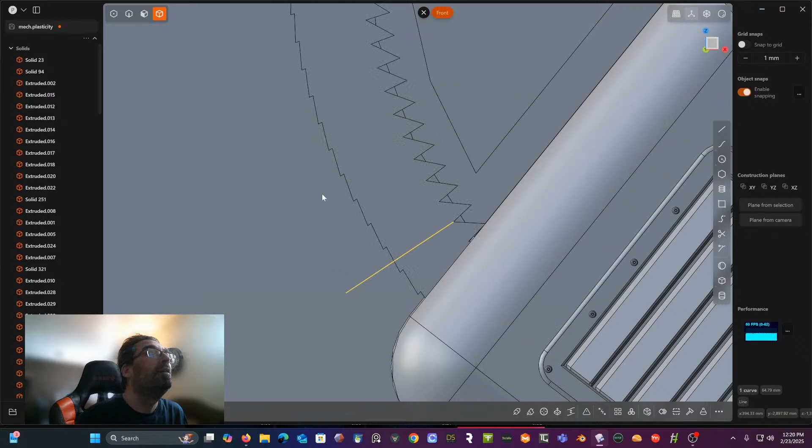So I'm going to cut this with a curve, from here. And it doesn't matter where, because that's going to get deleted anyway. We're just going to have these little chops into it like that, I suppose. We can move that closer if we wanted, but it may be cool. It may look like crap. We're going to find out.

So let's take this guy and cut it with that line, which may work. There it goes, delete all that. And now we're going to use that as a cutter for this. Q, that erases. We go like so, and we're left with these. So I think that worked out really nicely.

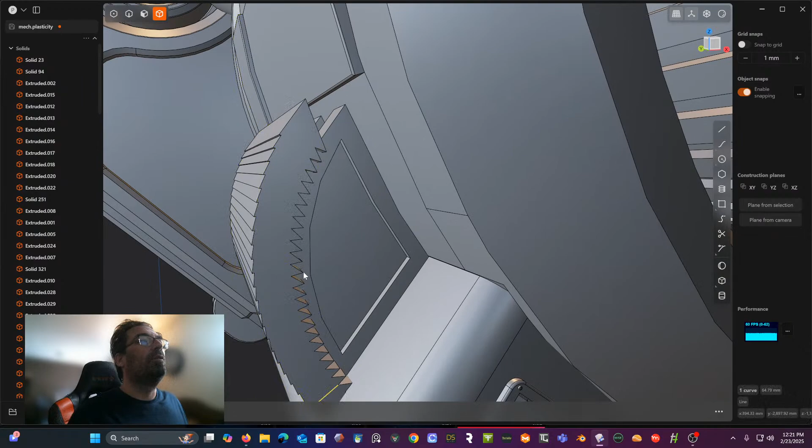Really nicely. And let's undo that. It may kill me for doing that. I should have done this before we even pulled that out. So let me go back. This is the part I hate because it's more work than we need to be having. But let's just go back here.

Those sharp points shouldn't be, in my opinion. So let's just grab the curve. And I think we just do this to all of them because, yeah, because we can. And we're going to join those again. Should be joined, I believe. Let's just check. And yes, we are.

And then I'm going to take my little fillet tool here, if it will cooperate, which it's not. Lovely. Let's see if we can just at least fillet the points of these.

Yeah, we should be able to do that. It gets weird when it's internal or inside and outside, tension on the curve kind of thing. It may work with that end curve or end point. I don't know, let's just see how well this can handle it. And pray, pray, pray. It looks good.

You see what I've done here. I've either rounded them - I think we should fillet them though, or chamfer them, I mean. I think that's okay. Let me just see how far these go in now, because we don't want to use those top points, because that will... Oh, actually we do. We only want to use those top points.

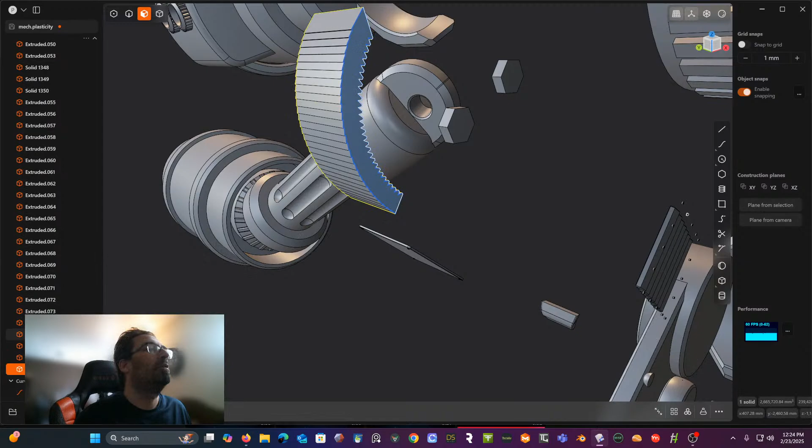And that way we're not chamfering the distance out of them. I think that's what we wanted to do. And now, of course, I will go back to this mode, pull it that way, and get rid of the curve, and pull it this way as much as it needs to be.

We'll turn on all of our pieces that are off. Just going to come back up here and bring everything back. So now we should be able to, yep, safely delete. We need to also chop the bottom, I just realized, of this whole thing.

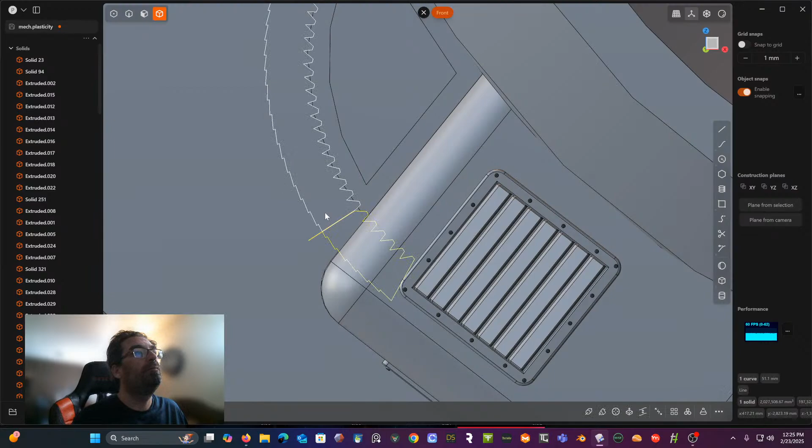So from the side here, just on this piece, I'll just make a cut from here and just straight out, it doesn't matter. We'll cut that piece with that, delete these pieces like before, and then we'll take this, we will cut it with this, right click, and we are done. That looks way better.

So now they have some nice gear-like pieces there, and I think that just looks better. Not sure what to do if anything needs to be done with the inside and outside of those, but I think that looks kind of like a nice different sort of, I don't know what kind of bracing, but I think it works.

And I'm wondering if this toolbox should feel more separated or integrated, and I think separated is going to look a little bit more mechanical, which I dig. I'm just going to test. Yeah, it doesn't want to. I'm going to have to wind up separating that later, maybe. We'll see.

Yeah, I like panels. It's a very leftover Star Wars thing for me. Let's throw maybe a bit of a panel in here. So if we take that whole piece, use an offset curve on it, decide how far we're going to do it - some of these take a lot. So now we're going to have this area that we can turn into a little raised panel. Not bad. Probably should have offset or curved those edges.

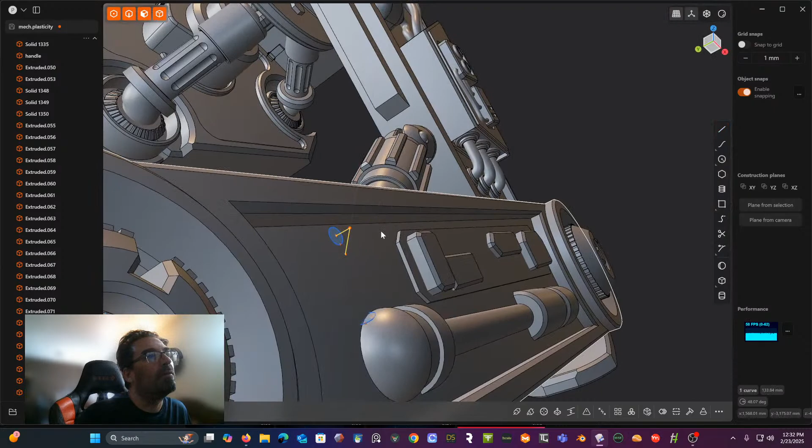If I have to, yeah, knew that was going to happen. Grab it, we're going to go out like that. You can shift or select a point, shift, and then when I move this one it should reference that other one. No? Maybe not, okay, either way it still works. We're good to go for the most part.

I'm going to just push that slightly out more. And then what I want to do here, also that needs to move forward some, is to take that point and also join, make sure these curves are joined. They are. So I'm going to take this point and fillet it.

And then take this and we're going to sweep along this. You're going to say how much and how wide, but that doesn't seem to work. Don't know why, I don't know why that didn't work.

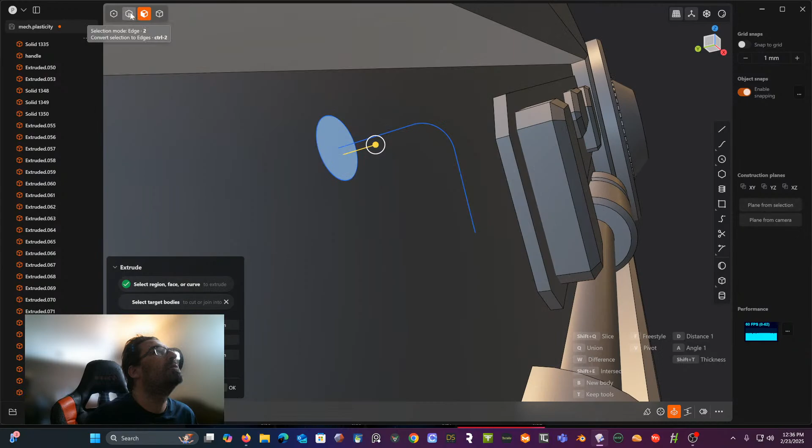It's almost like they are not in the same space or something. Let me see. Grab, I'm just going to snap that right, perfect center. There's no reason, I don't think, why this wouldn't work, but you guys get to see all my failures. Sweep along that.

Yeah, to be honest with you, I guess I have no idea. Now, oh, it did work. Why did it suddenly work? Because I pulled this scale up, isn't it? It is. Well, hey, every now and then something does work. Great. Okay, so is this parallel work as well, or is it only the normal that works? Just the normal. Perfectly fine with me. It's kind of where I wanted to go with this.

Now check this out, I thought it was pretty cool, but you can take this bridge curve, I think it's called, and go from here to here. And it makes essentially a pipe. And then if you want, you can use, I think, piping on this should be perfectly fine, and you can now have a hose that goes from here to here.

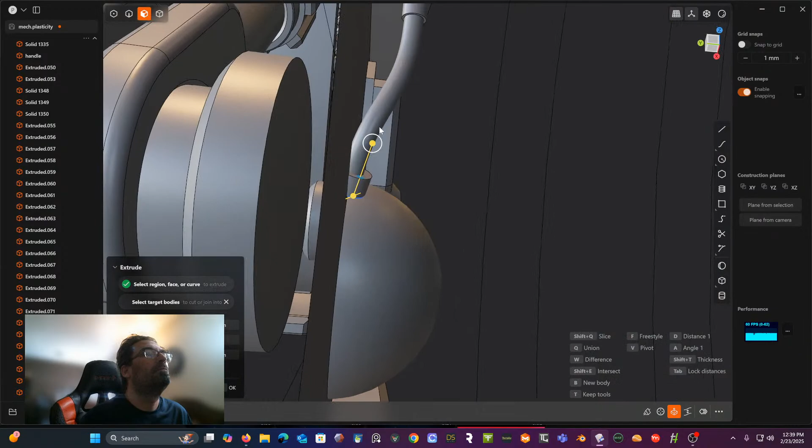Let's pull that up however it needs to be. In fact, I'm going to rotate it. Not like that, not taper it. Maybe slightly. And then rotate it using our, I guess V. I could do the free, but I think I'll just rotate it from its own edge like this and like this.

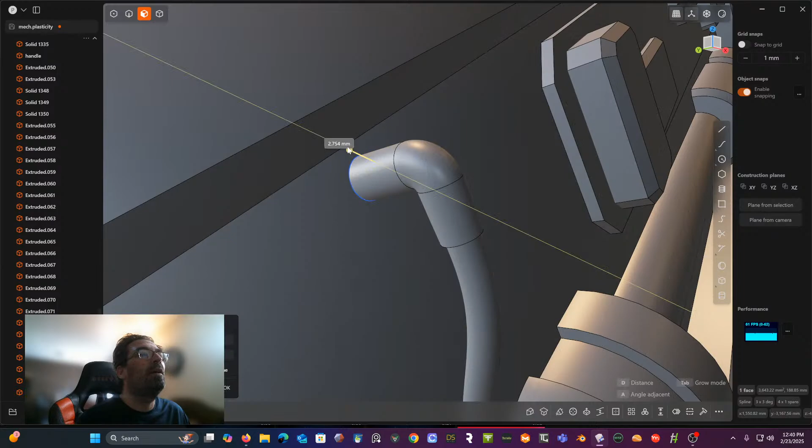Cool, works for me. Yeah, that works, let's see. So if I want to, I can also select this face, maybe make it a little bit larger. So just by, is that going to work for us with this setup? Probably not, because that's already, oops, did I crash? I think I crashed, guys.